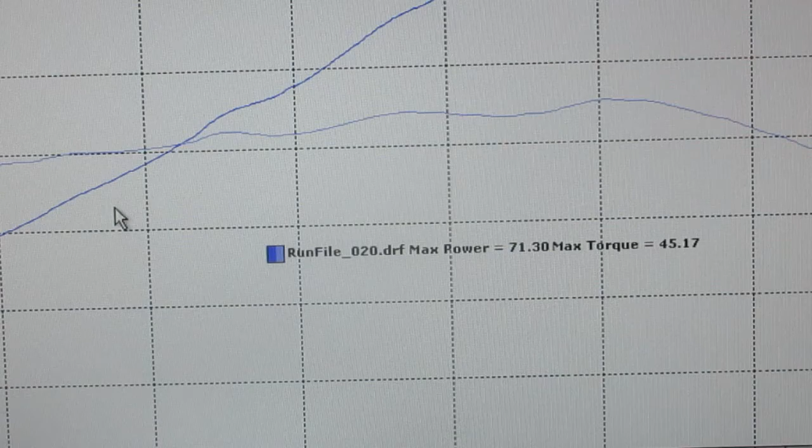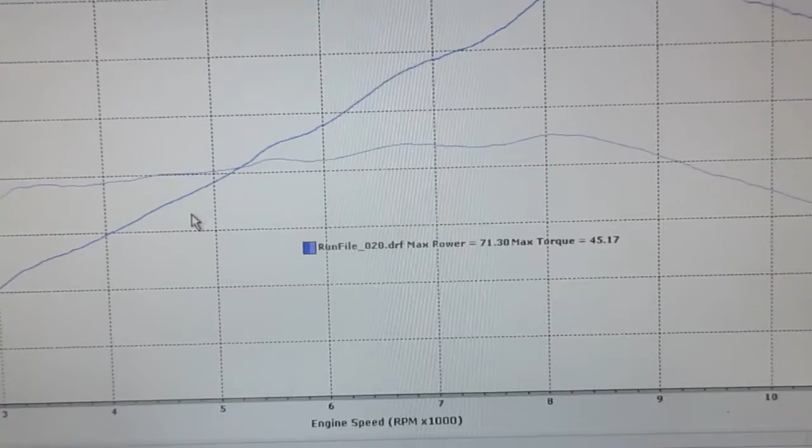And by the way, my other review of all the mufflers and the bike before it was tuned is part 7 dyno chart review of this bike on YouTube. Okay, so here's the stock bike, just like it was in the other one, number 20. Okay, got to remember I'm at 4,500 feet elevation.

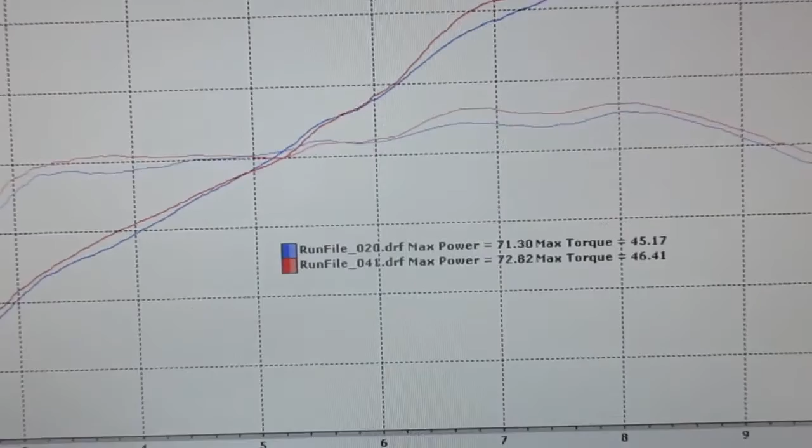Okay, now we're going to put number 41 on here, which is one of the very best pulls, or the best pull from the previous session, not tuned yet. That's my 14-inch Comp 2 core, right? There's your numbers. Let me move this over just a tad, get it off the line there.

Okay, you got to remember this is peak. Peak, it's not going to make a lot more horsepower because the restricting factor here is going to be the original header with the cat in it, of course. Okay, once it starts really pulling up top.

But you know, this motor doesn't make power past about 9,000 RPM. Between 9 and 9,500 at the most is where you should be shifting this thing when you're getting on it hard, like on a twisty road. About 9 grand, 9,300. So really up in here you don't really pay much attention, but see how it still holds it way ahead. Okay, so there's the differences from stock, even no tune.

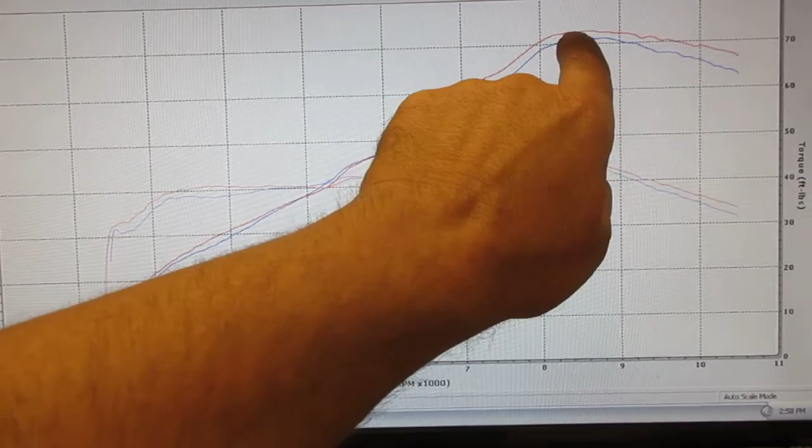You know, you got a lot more torque. This is your torque line. Here's 2 or 3 foot-pounds of torque, and then it holds it all the way. Here's your horsepower line. It made about 4 horsepower here. This is 7,000 RPM right here. This is 6,000 RPM. And then it holds it within 3 and then holds it up here. Okay, so that's no tune yet.

Okay, so now with more air into the airbox and my tune-up, which I cleaned up the air-fuel a lot where it had some of the rich spots and things stock. Only wide open it still was good. Steady cruise, light throttle, just getting on it hard is where it wasn't too good.

Okay, so now we're going to go right to my best session today, number 95. I've got 97 pulls on this thing now. So there you go, and that's still with the stock front header. So let's get rid of the stock pull for a second. That's 20. I'll take that one off. Okay, so here we go.

So see here, here's no tuning at all. Here's with my tune-up now. Same muffler. Nothing else changed, just my tune, K&N filter, a couple little minor mods I did to the airbox. Be easy for you to do. Okay, but look up through here. Look at the torque. I made almost, that's 5 foot-pounds of torque.

This is 5,000 RPM, 4,000 RPM, clear down off the bottom. This is between 2,200 to 3,000. Okay? But even right here past 4 it starts climbing. It's about 4 foot-pounds, about 5, 6,000 RPM, it's about 4 foot-pounds. Okay, and then your torque curve is nice and flat, still ahead.

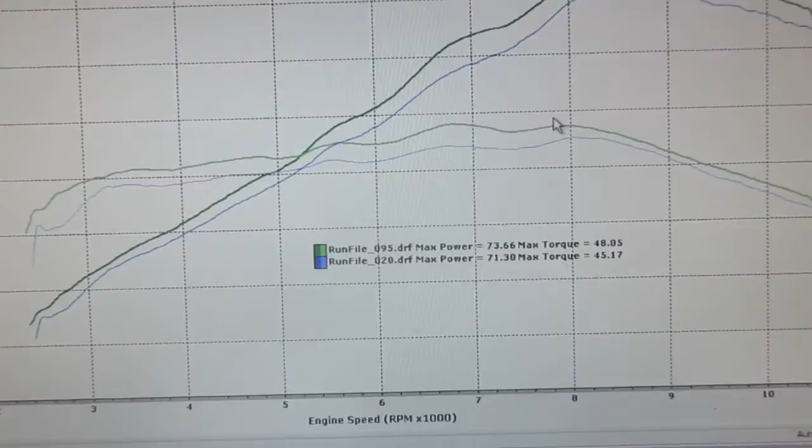Here's 9 grand, and it's way ahead of a stock bike, about 4 horsepower, even way past where it makes power. This is just before it hits the rev limiter on the tach, which is really about 10.5, 10.3. So here's your numbers. There's your stock bike, 71.30, 45 foot-pounds, right how it sits right now, still with the original front header.

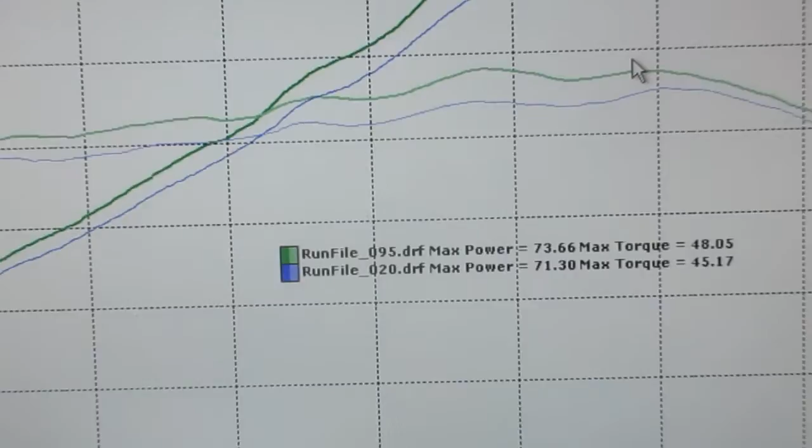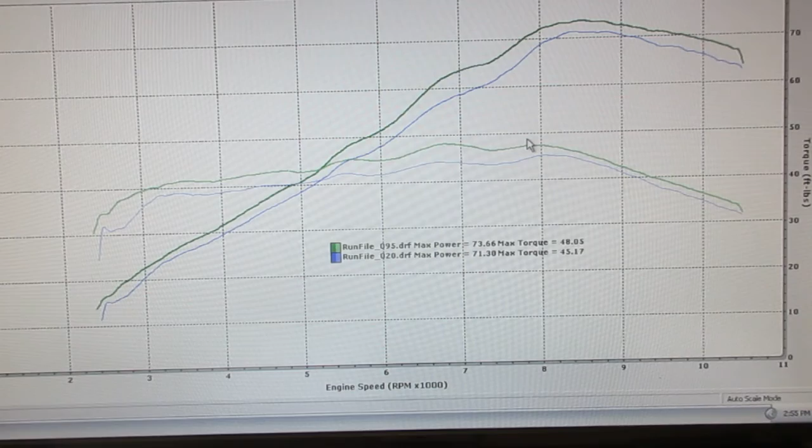73.66, 48.05 foot-pounds. And I have the air fuel really sorted out. But up in here, it's huge. I mean, it's going to pull way harder than it did stock. I mean, way better. So, that's it for right now.